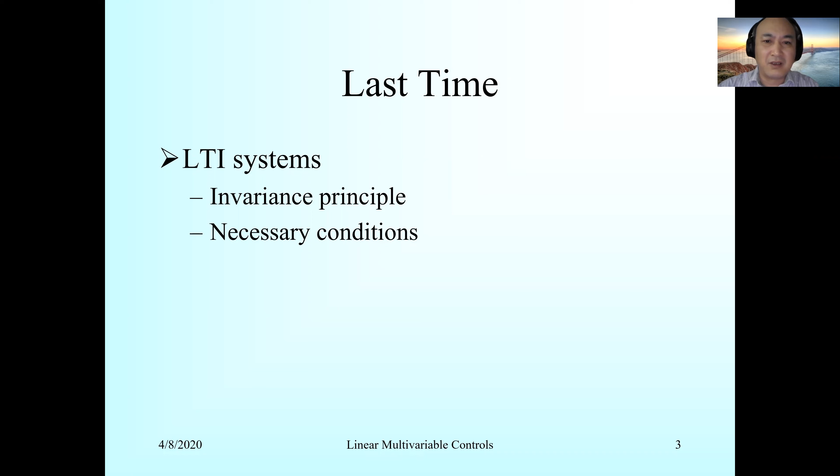So the final exam, perhaps we're doing the same thing as the midterm, okay? It's in-class, 90 minutes. So we talked about LTI systems, necessary conditions, BIBO stability, and the relationship

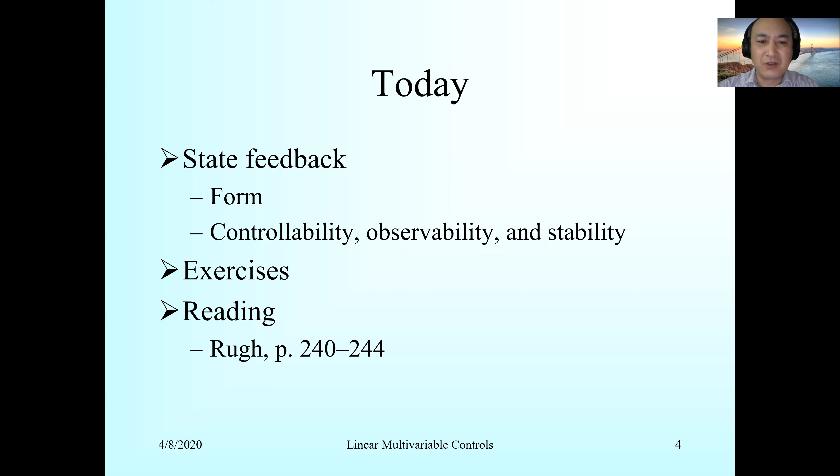to the impulse response. So starting from today, we are going to talk about feedback, different standard forms, controllability, observability, and stability. We'll see if I have time to do some exercises, but perhaps we don't have time, okay? For readings, 240 to 44, on feedback controls.

So remember, we have a difference between state feedback versus output feedback. Usually the logical sequence is to learn state feedback, then output feedback. So state feedback, bear in mind, is just mathematical preparation for output feedback.

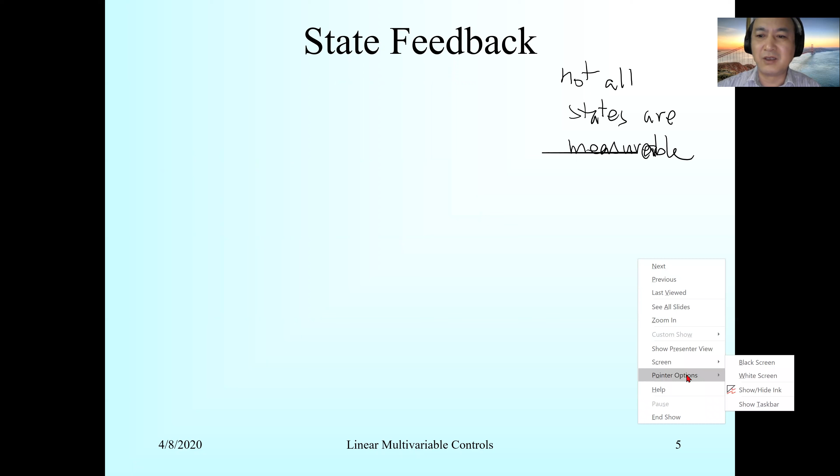So in practice, you should say that not all states are measurable. Not all states are measurable. Some of the states internally simply are not observable - I should say not physically measurable. Not all states are physically measurable. You don't need a 'not' here, I'm sorry.

So the idea is: you have a system, you have a disturbance, and you give a command. This is the command or reference. Give that to it, so you get output. Then, I think this should be called the actuation signal. So you get output here.

So now remember we're talking about output. When we say x dot is Ax plus Bu, y is Cx - if y equals x, then that's called state feedback. But in general it's not true, you cannot measure all states. So you have a C in here. And the dimension of y may not be the same as x, as you can see, C may not be square.

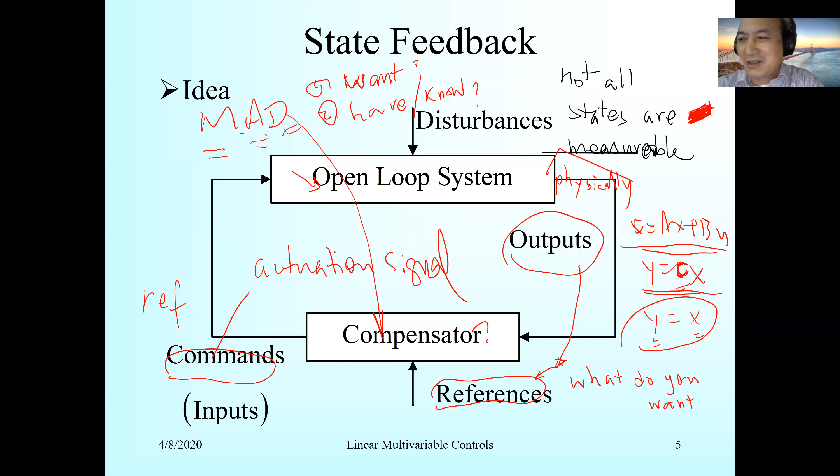But there's another hidden requirement - you have to guarantee the closed loop is stable, okay? And it's not only from an in-and-out point of view, but also internally, okay? Internally, meaning there's no signal within the system that is unbounded. So you cannot say, oh, the in and out looks fine, but inside the system is unstable - then you'll blow up the system as well. So we need not only input-output stability, but also internal stability. I think this is a hidden requirement, it's a basic requirement, this is necessary.

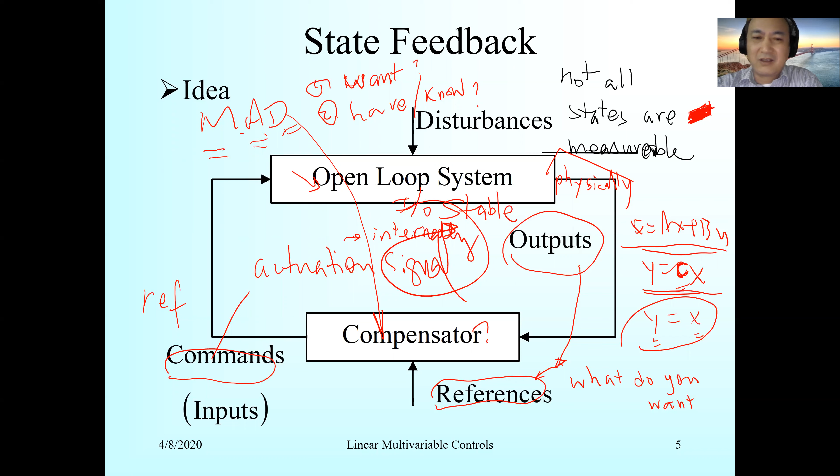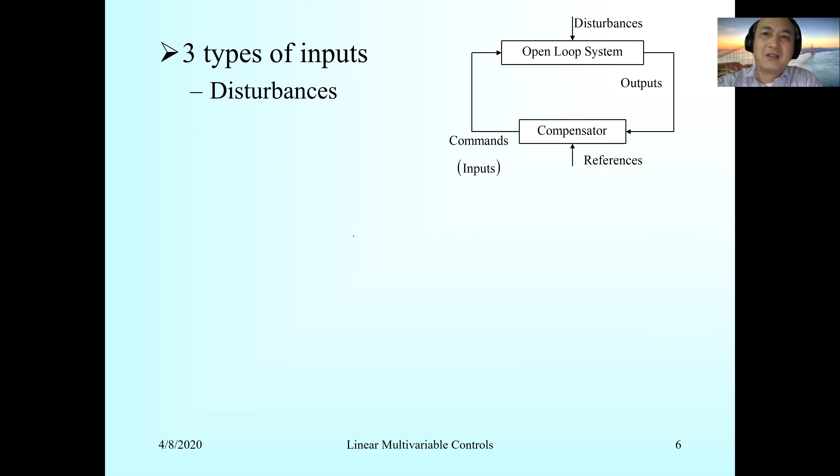So there are three types of inputs. One is disturbance from here, but remember the disturbance could be from here or from here. In the front, it's called a load disturbance. In the after, it's not called load disturbance, it's called output noise, output disturbance, like measurement noise. So remember, when we put it in the front or in the middle, it doesn't mean it's here or here, so it's just general. That's external reference, our command, answering the question of what do you want.

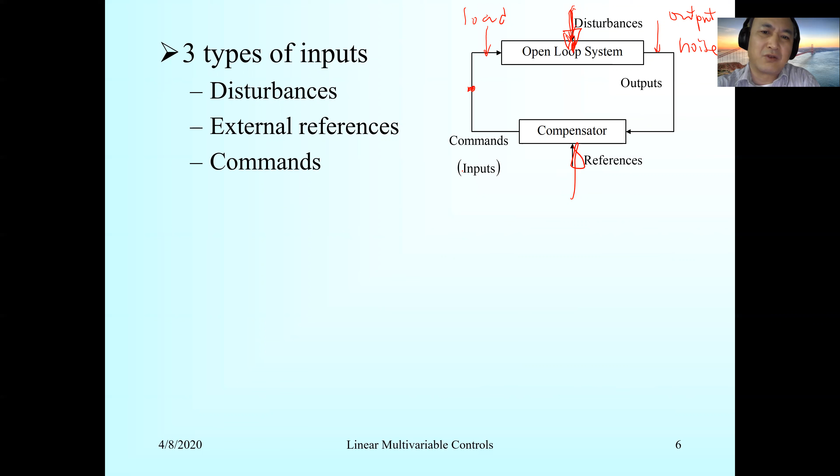What do you want? And commands, that's the actuation signal given to the system. It's also called a control signal. Control signal.

So let's concentrate in this course on commands. We talk about U and Y. We don't do this a lot. So far we focus on not closed loop, but giving U, giving Y, and you have A, B, C, like state space, or you talk about G of s, or in a MIMO setting. MIMO is default, okay? When we don't say anything, everything is MIMO. And actually, if nothing is specifically said, it's LTV. MIMO can be state space, can be IO, input-output model.

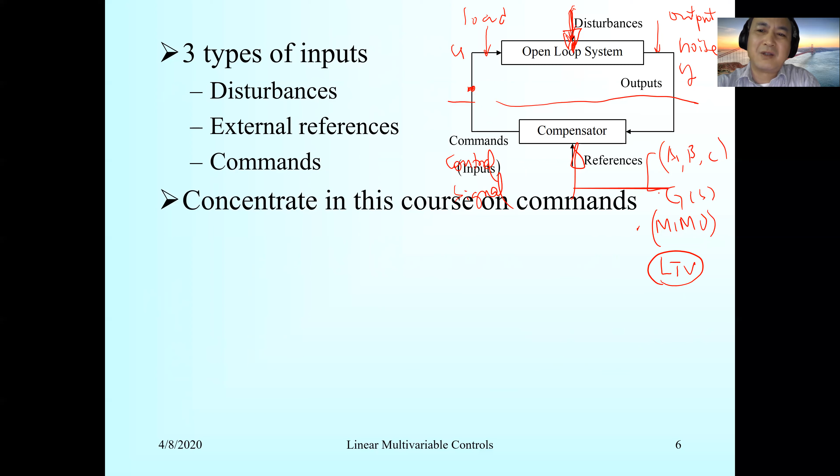Talking about the state variable model ABC, the controller is a compensator, called a state reconstructor, because I said the state X feedback is not always possible. I told you, not always possible. So how can we make this happen?

So basically you have input, you have output, you also have the input signal. These are U and Y signal coming out of here. So this is called OBS, observer. It comes out with an estimation of my X. Then you use everything you learn for state feedback. So you need to have a reconstruction, this is called reconstruction of X hat. Of course, I hope my X hat asymptotically will converge to X of T as T goes to infinity, so it's asymptotically stable. We'll show this later. So that's the estimator of the state, and then you need to decide what's the gain feedback.

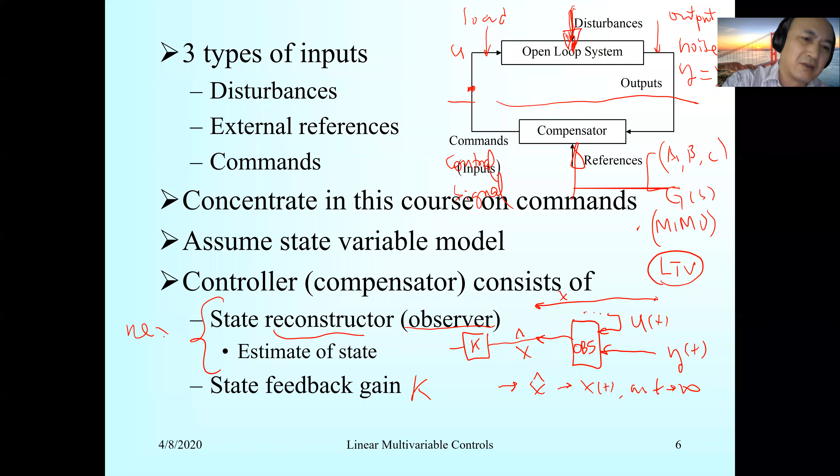So let's start. And of course, this is LTI. State is available, so Y equals X, so C is I, okay. State feedback means you have a reference in here, add to this U in here, but you also have a minus KX. So this is called state feedback.

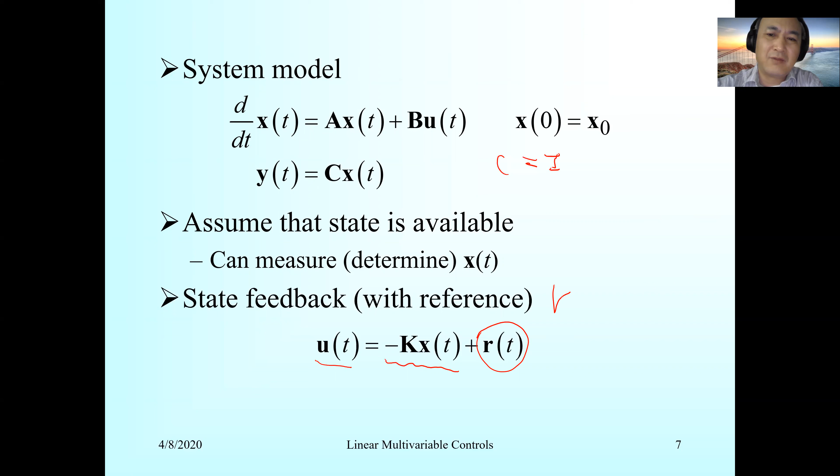So do you guys believe this is right? Why shouldn't we put another KR gain matrix in here? Why? I don't see any reason you should set the coefficient in front, that is I. So right now it's I, right? So that's not really correct to me.

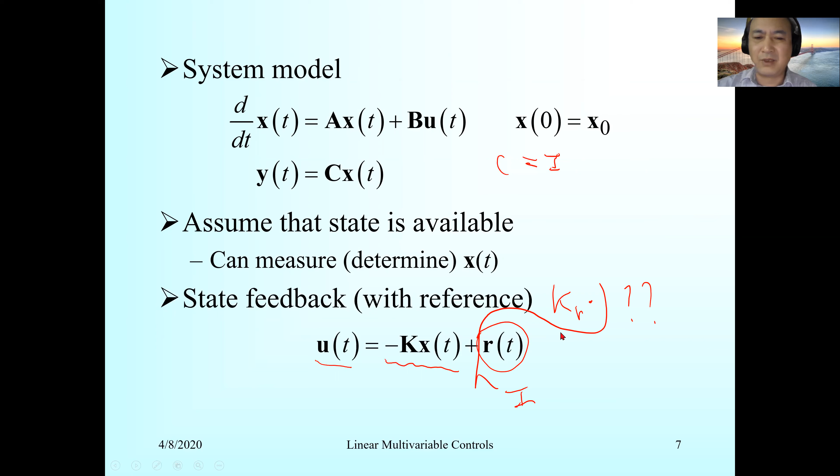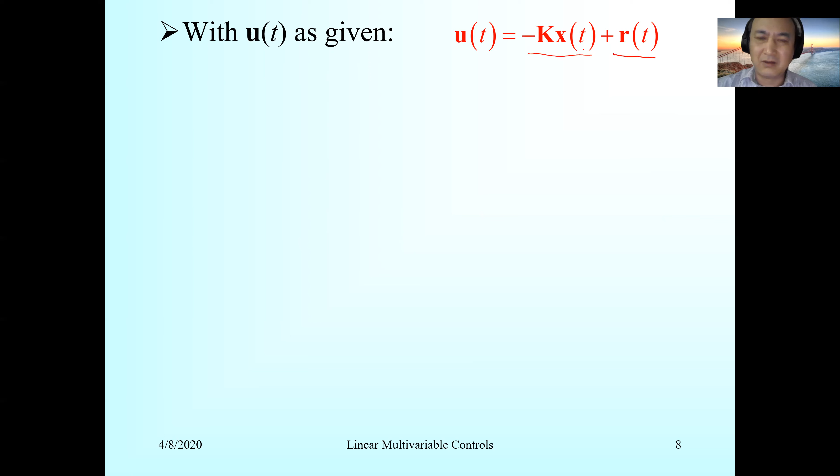Let's see. We just have a reference in here, have K in here. Basically I have a U which is my control, Y is X, C is I, okay. Giving this X, you have K times X. Now you do this way, okay, that's correct. You put I in here, then you have this signal here and drive it, drive it. So that's, this is a control structure, control structure.

So control design, usually you first ask, what is the structure? Second is, what is the parameter? Control parameters or control gain matrices. So when you talk about control, you should answer two questions: what's the structure, what are the parameters? So here we answered the first, so now what remains to decide is the K. I don't know what is the K. So I need to choose this K such that the overall system is stable.

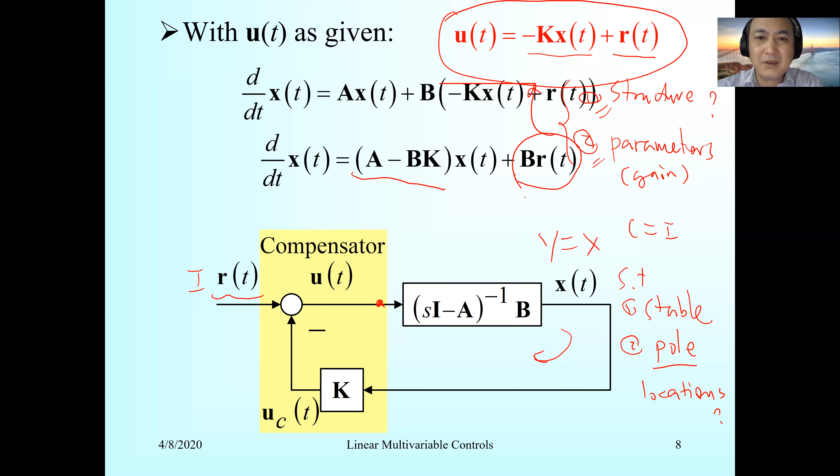So when we write this one, we can see we have A minus BK, we have BRT. So, okay, this is called closed loop state equation. Closed loop state equation. No question, right? So this is simple.

But I hope you notice that this reference RT is given, and B is also given. And remember, we should have the question: is A and B minimum realization? Is A and B a controllable pair? So all these are the questions. So it's not like an arbitrary A-B combination will do all the work. That's not true.

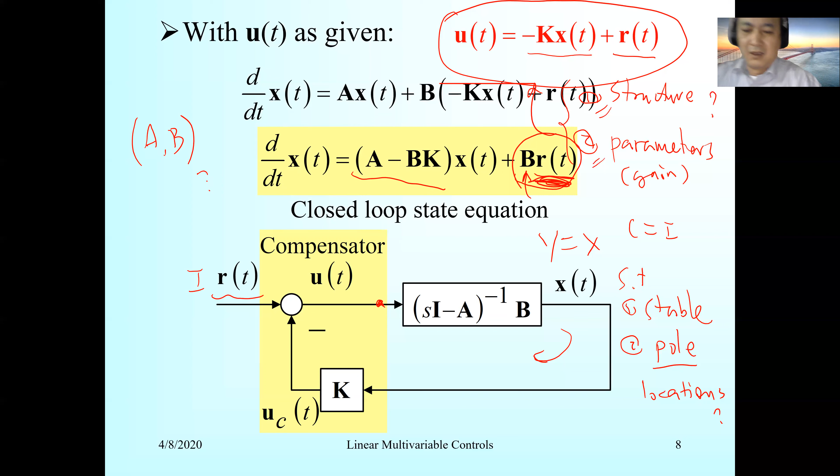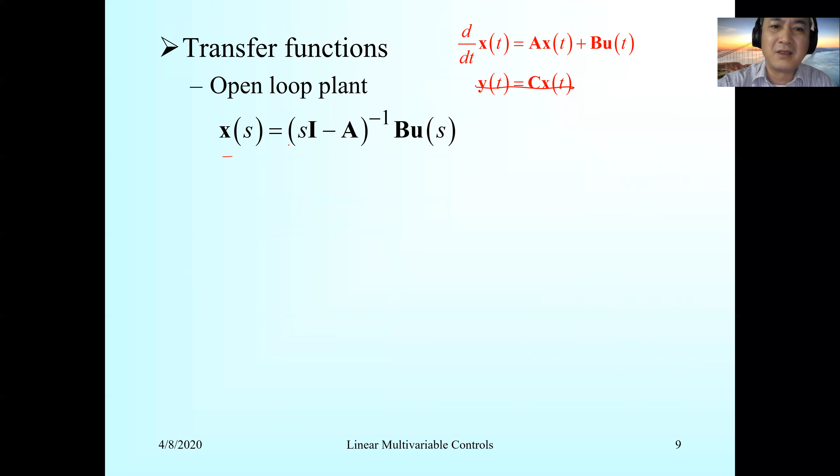Let's move on. Let's say the transfer function is like this. Remember, in overall speaking, C is I. In this case, you don't consider this term, so you only have y equals x, so x is y. So it's (sI minus A) inverse B u, okay? So that is something here.

What is a transfer function? Transfer function is basically x of s divided by u of s, okay.

Remember that we are doing MIMO here, so we need to be careful, and writing it this way is questionable. You should not write it like this, since these are two vectors. So be careful. This is a matrix, it's a MIMO matrix, and you cannot swap their positions.

So this is an open loop system, an open loop system without feedback. If we have feedback, U goes to this equal to K times X equal to UC, the control signal. And the UC, that control signal, will feed back, and this UC will get R minus this UC. I'll come back to this later. So this is called closed loop with this K.

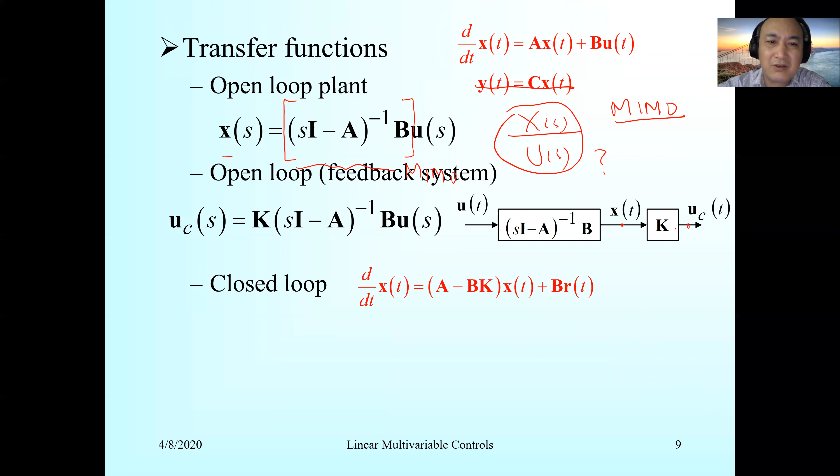From UC, this is open loop. Once I have closed loop, then I have this form. So then what is the input? Input is this guy. So instead of talking of X divided by U, I have X of S divided by R of S. So the whole thing becomes like this. So compare this one to this one.

I don't see anything changed except you have a BK in here. BK in here. B is given and K is to be decided.

So to decide the K, you have to tell us what do you want? What do you want to achieve? We'll answer this question later, but keep in mind, control is to address the question about what do you want and what do you have, what do you know? These two questions.

But there are two more questions after that. Everything is done, then you have to answer two questions. One is how optimal, and how robust. So if you ask these two questions after everything is done, then you are at a much higher degree.

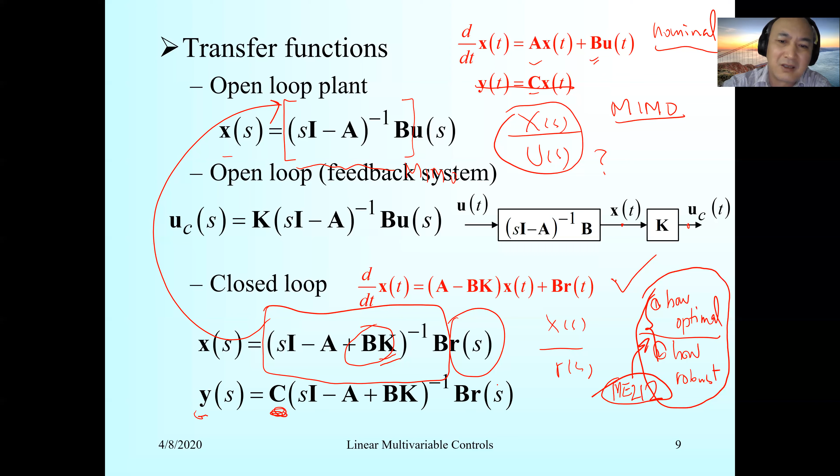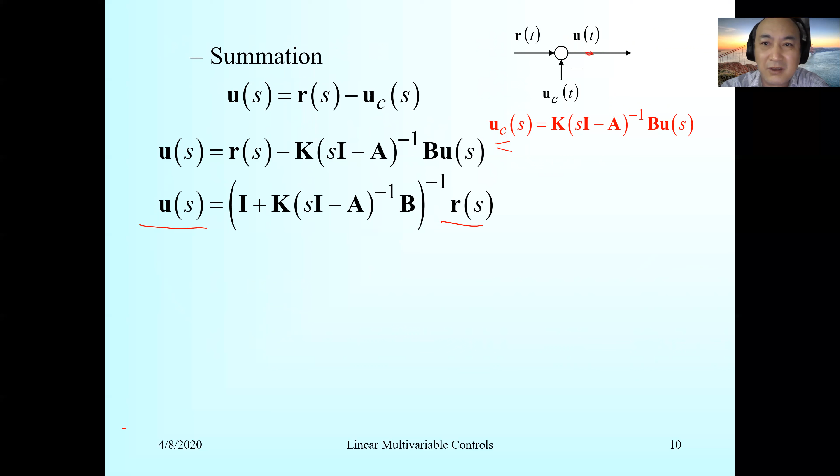So then if you have a C, then Y equals CX, and you will get this closed loop system. So there's a summation in here. Of course, we derive the UC signal in here, so you get this. So U of S is R of S minus this. So you have this, from U to R, from here to here.

So this one has a special form, this is a MIMO case. So this one inverse is here, because we say this is U. So this whole thing is U. And U and R is converted from here. And this whole thing has to be the same as we derived before, using other derivation methods. These two things will come up like that.

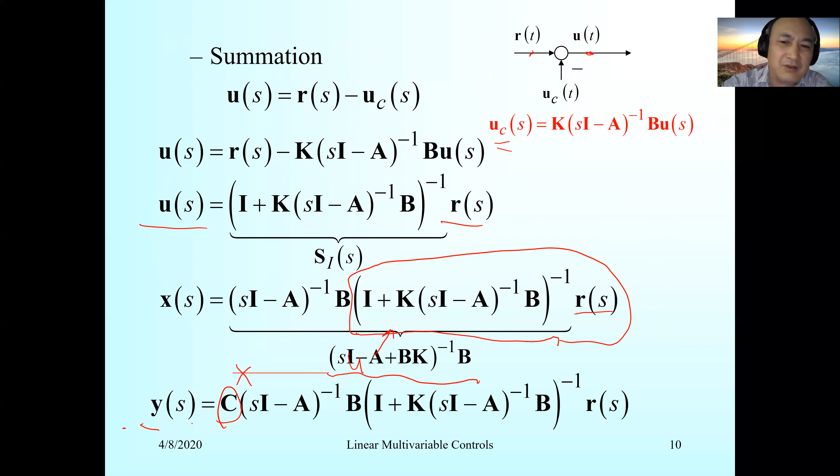So if you have output, then you just add C times X. So X is this big one. So from Y to R, you can just derive it. I hope this is not very confusing. One thing a little bit confusing is how to convert U and R.

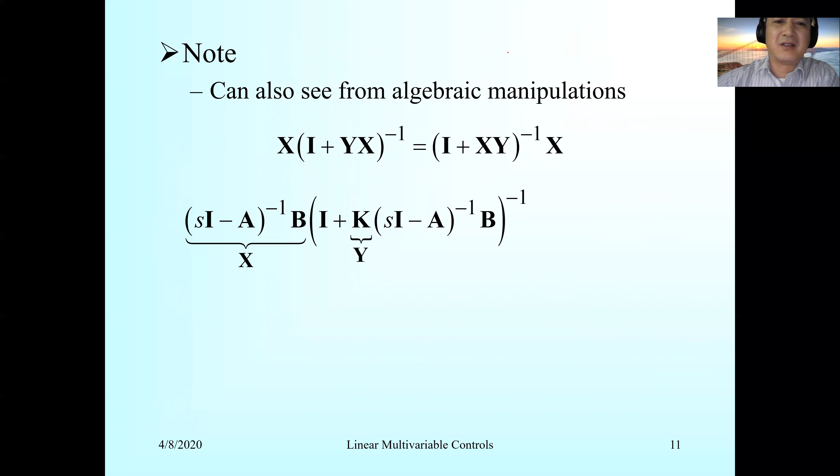So from algebraic manipulation, this is interesting, and this can be proven. We assume this side is X, and we also know this is X, so this is Y. Then we can pull out this one inverse, and this is X. So this is my X.

Let's mimic this to check. This is true. If you need a proof, that's actually easy. You left multiply this side with this, so you get I plus XY times X. And you multiply this one on both sides, you'll have X times 1 plus YX. So you right multiply both sides with this, left multiply with this, so this to this, to here. So you get X plus XYX equals X plus XYX. So it's the identity.

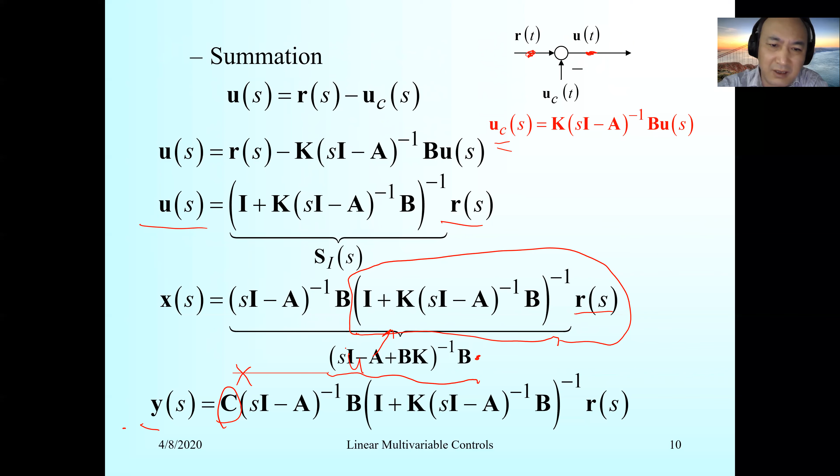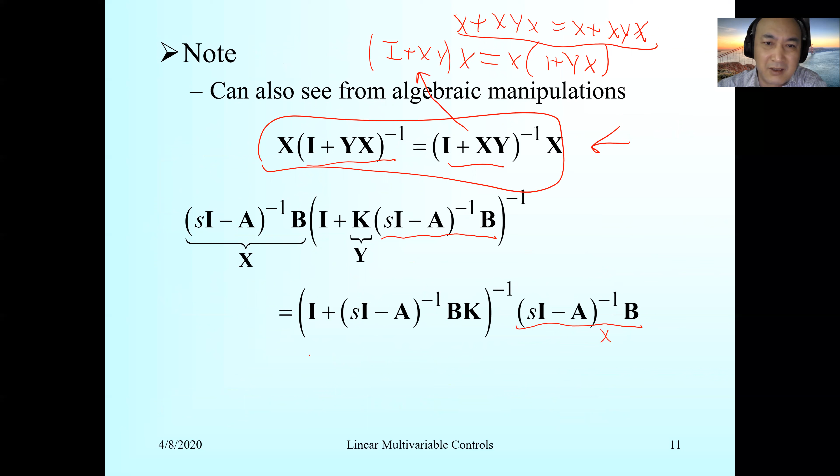The reason is we never see something like this, Y to R or X to R. We didn't see it like that, so this is very strange. But we have seen this whole thing before. So then I'm showing you that this is a matrix identity, and this is called a matrix identity.

So then we can write stuff like this. However, we can group them because you have an inverse, I have an inverse, I can group them. So I can just multiply inside, and this is I, this comes out. So you will get the same thing like this. So all this MIMO signal manipulation, just be careful about left and right multiplication. You need to be careful.

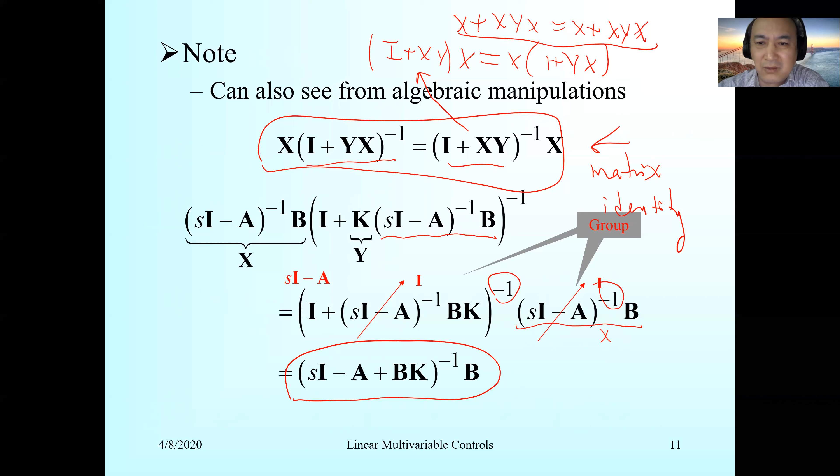So that's open loop, closed loop, that kind of manipulation. I hope this is quite clear to everyone.

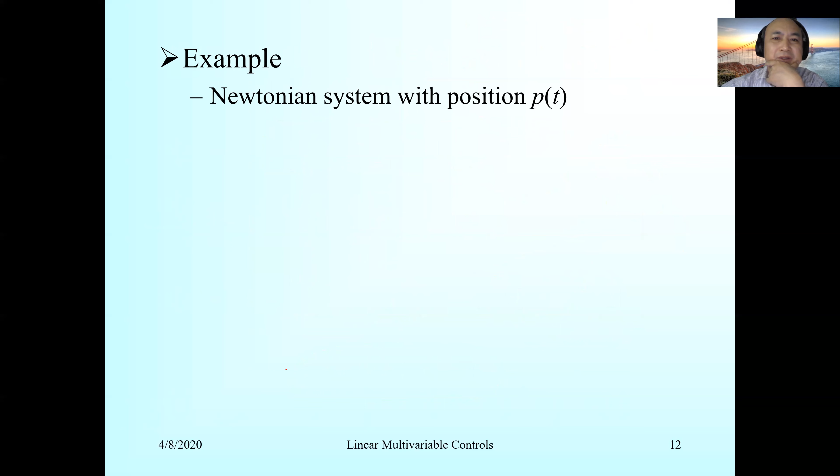Let's see an example. Newtonian system with position P, you add a force. What is this? This is Newton's second law, right? So position double dot is U, my force, like ma, F equals ma. This guy is my ma, and this is F.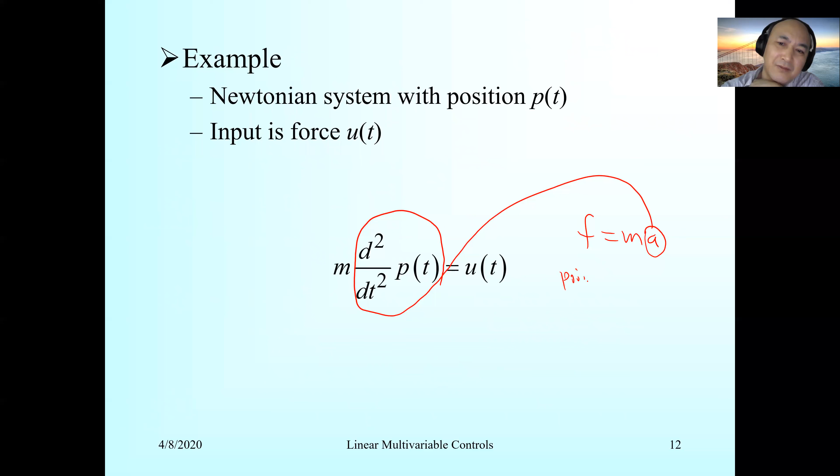So on the other hand, Newton's second law is also called point mass. And if you put the U in here, and you put P in here, what you put here is this one. So you should have 1 over m, right? So basically the point mass Newtonian system is nothing but open loop wise — it's a double integrated system.

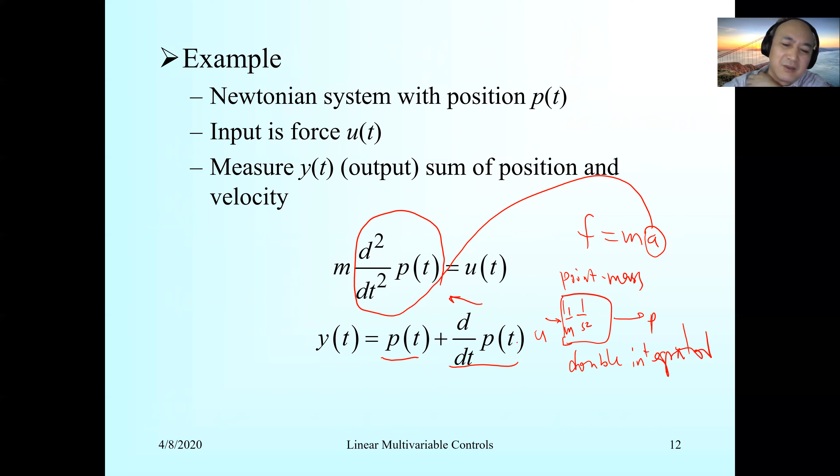So if you see this one, you should immediately say point mass Newton's second law. So assuming that you are measuring the output, and the summation of the position and speed add together as a variable, it's measured. So what's the transfer function? Because this is position, this is velocity, and this is a double integrator — that's my transfer function.

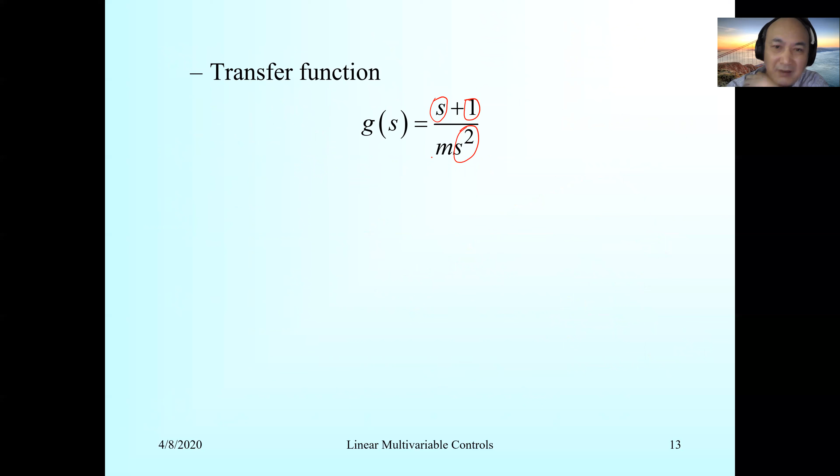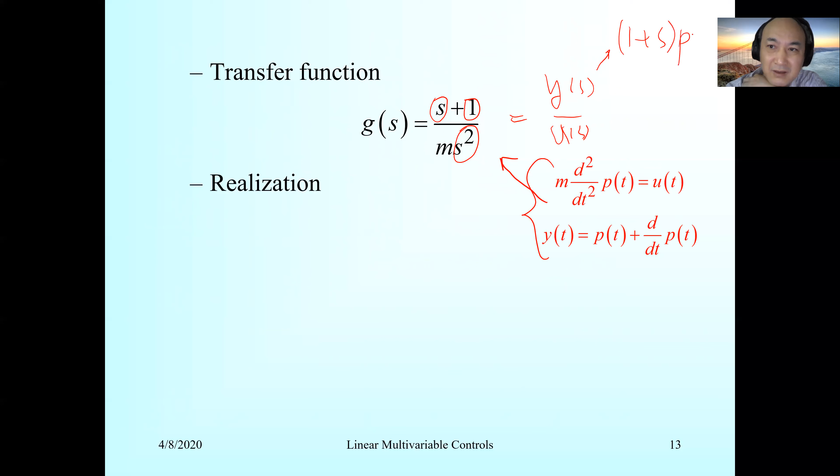And this transfer function, we can do realization, from an in and out point of view. So this is basically with a U of S, and this is Y of S. But Y of S is actually 1 plus S times P of S.

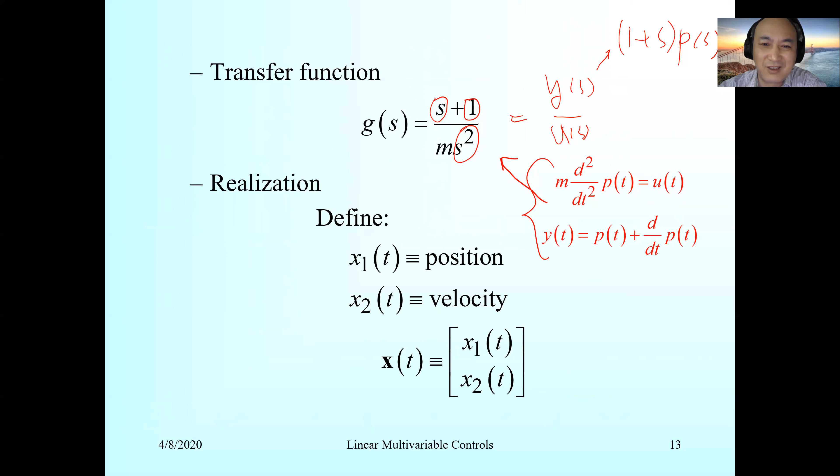So x1, x2, that's the standard state vector. Let's just say there's unit mass. So we're going to have something like this. What's this one? This is nothing but the Jordan form. We learned that the last column, last row corresponding to B, if it is non-zero, then it's controllable. And its first column corresponding to C, if it's not zero, then that's observable.

This is a SISO system, isn't it? Yes, so then it is. So this system, we can see this ABC is both observable and controllable.

But remember the output here — so I have x1, x2. x1 is position, x2 is speed. Say for example, I'm only measuring speed, I'm not measuring position. Then we are going to see this system is not observable. Yes or no? So without measuring position, position is troublesome.

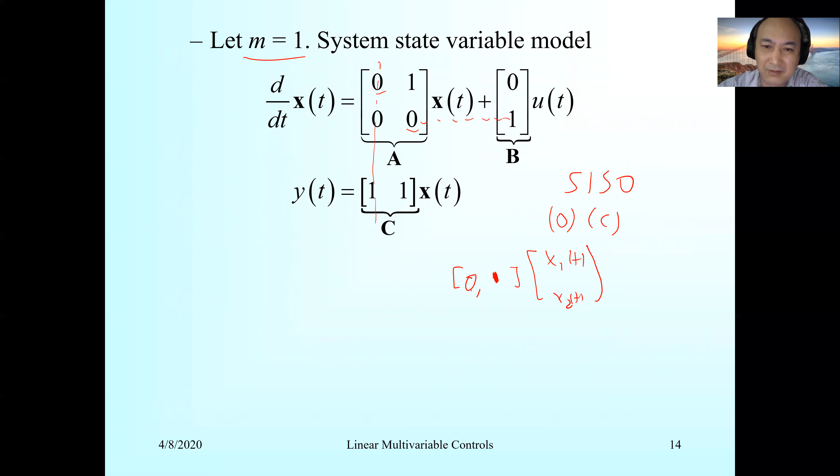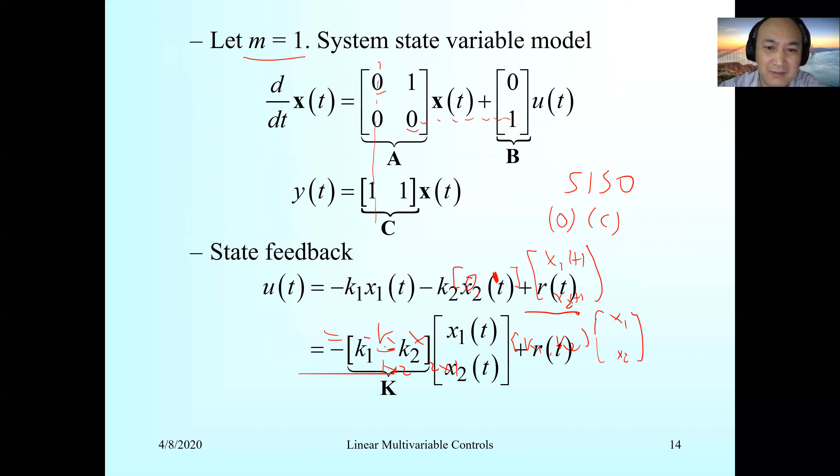So that's the structure of my controller. I'm doing state feedback, and yeah, we write it this way — it's the same thing. Then the closed loop system will be A minus BK.

Remember, B is 2 by 1, K is 1 by 2, that's why you have 2 by 2. Originally 0, 1, 0, 0 is A. After you have done this, you have A minus BK here, that's BK. We didn't have any change in here, there's a C in here. So actually this looks like a controllable canonical form.

So that's a closed loop state space. If we do a closed loop system, you didn't do anything here. Be careful, I didn't do anything in the numerator, but I only changed the polynomial in there. Previously you only have s square, but now you have this.

So remember, I call it M, S, D: mass, spring, damper. I hope you understand, in this term, this is due to mass, this term is due to damping, the damper, and this K1 is due to spring. So it's like you have a point mass.

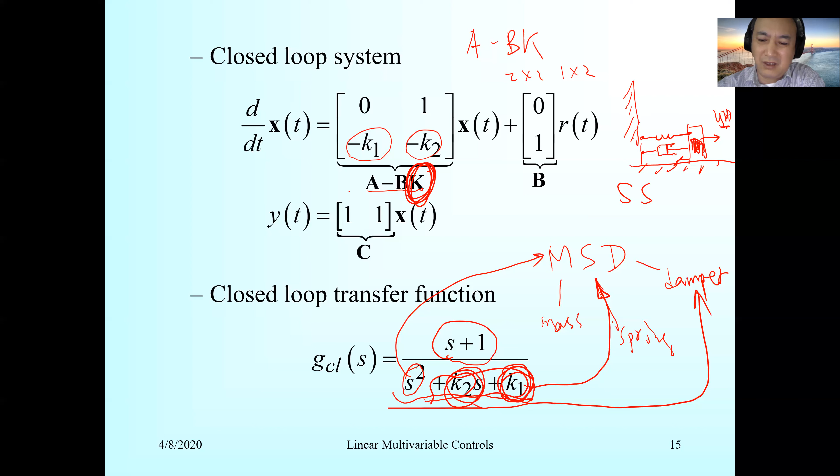So in other words, by introducing this K, not 0, you basically can change the system behavior, including its internal behavior and in-and-out behavior as well. So that's the beauty of the state feedback, you can change it. But the question is, can you arbitrarily change the behavior? That's the question we need to ask.

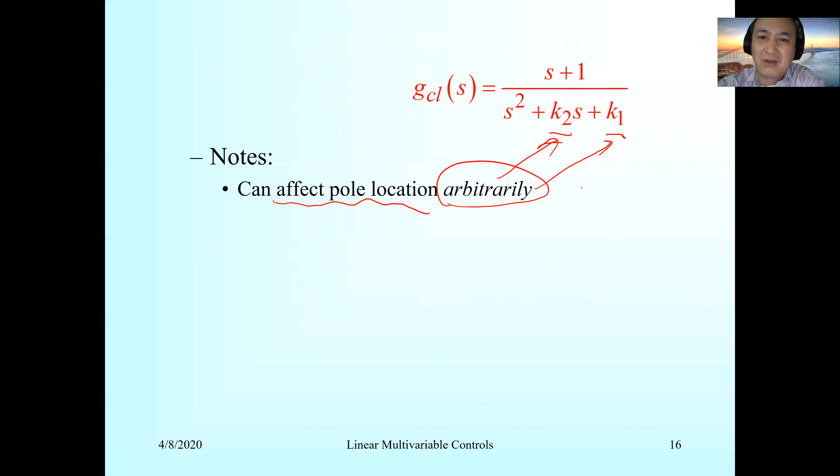It can affect the pole location because K1, K2 can be chosen arbitrarily, so the pole position can be located. So it's called choosing K1, K2 for pole placement. For the A, B, C system, somehow you can make the pole of the A matrix change to the desired position. This process is called pole placement. In the future I'm going to use PP for pole placement.

And nothing changed in the zero, okay? The zero cannot be changed via state feedback. So if somebody says they can do it, that's a lie. You cannot. So then the question is, can we do zero placement?

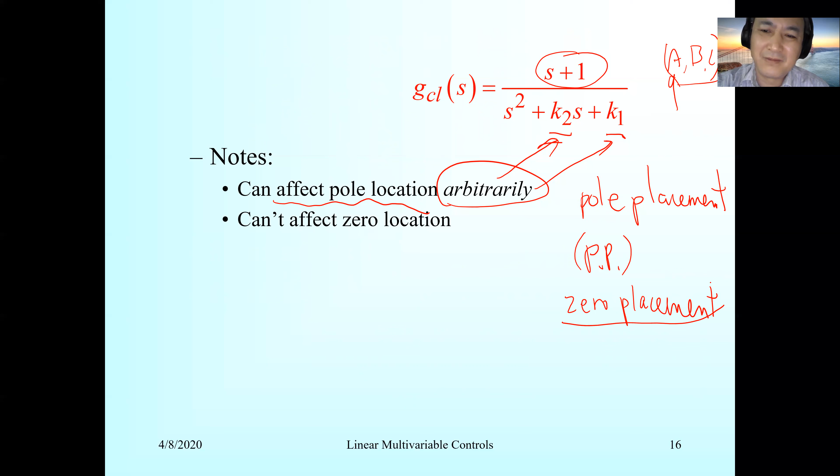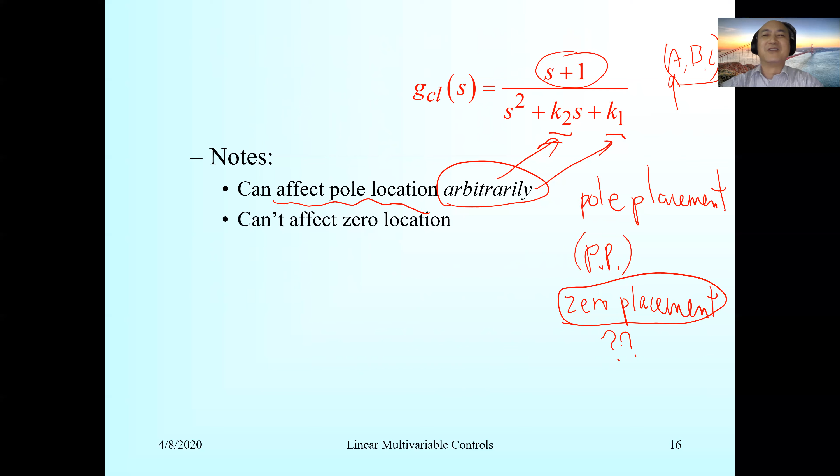Good question. My answer is, I haven't seen a systematic method to do that yet. So it's a topic of research. You can Google this term to see what you can find, zero placement. I don't think so, I don't think so.

So it's possible you can choose K1, K2 such that the pole can be coincident with my zero, so you can cancel out. So the closed loop state variable model may not be minimal. So after you have chosen the K, you have system A, B, C. After you have chosen the feedback control, it becomes A prime, B actually didn't change. So you only changed A prime. So this one could be minimum realization, but the whole thing after that, because of a pole-zero cancellation, it may or may not be minimum.

So this is something you should observe, because of the cancellation of zero. The pole can be arbitrarily placed, realigned with the zero, and it can be cancelled.

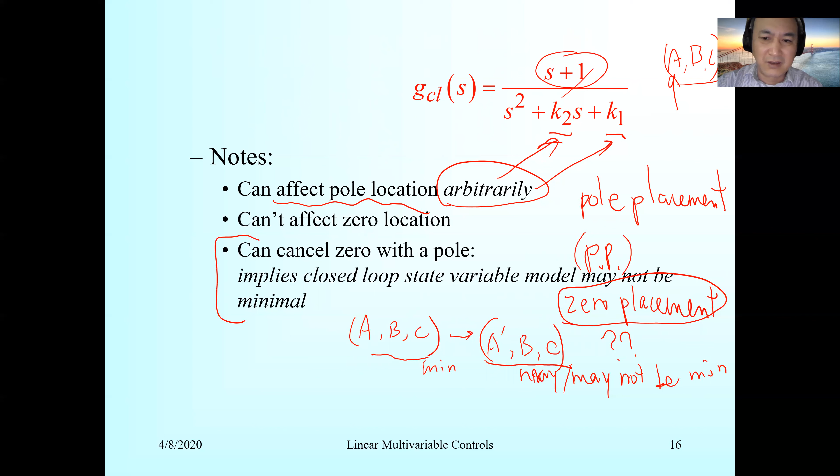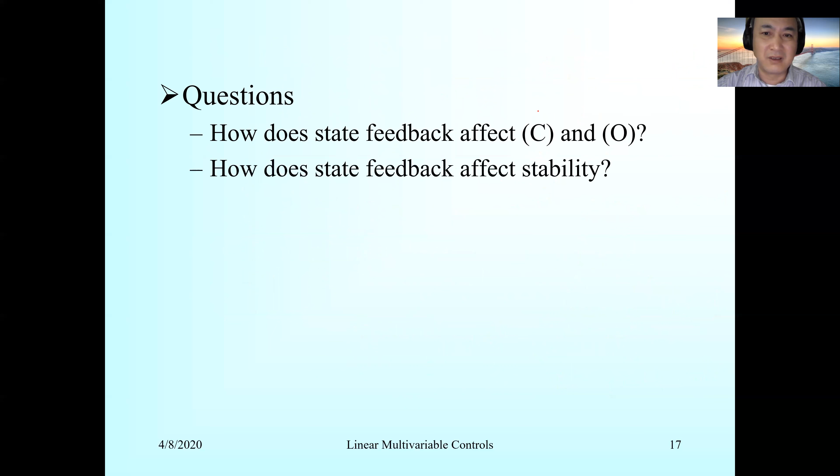So will the state feedback affect my controllability and observability? This is also a quite fundamental question, and whether it will affect stability. As you can see, the answer is, because you are placing the pole arbitrarily, you could mess up the system to be unstable by putting the pole in the right half plane. So what we can do is the state feedback, and we already answered that, we can place the pole. What if the state is not available? Then you have to use observers to reconstruct an estimate, it's called estimate.

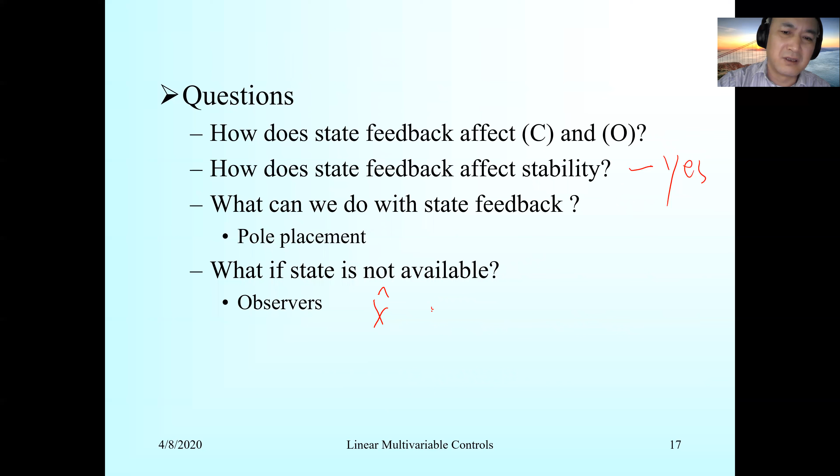Observer can be also said state estimator. You estimate X hat.

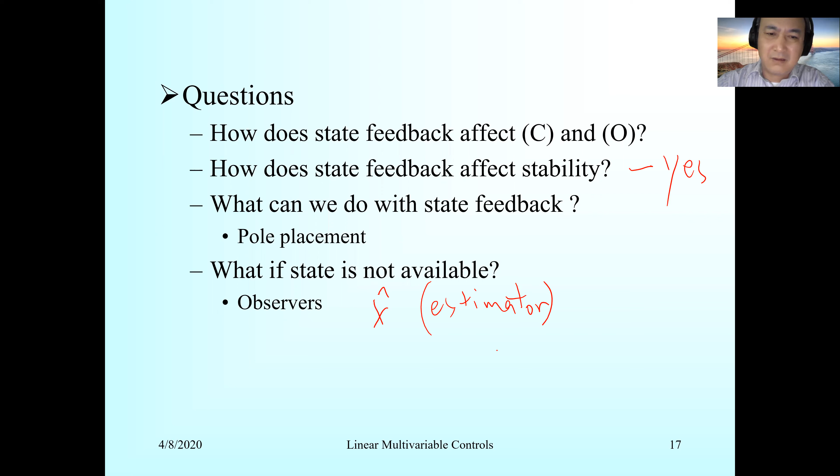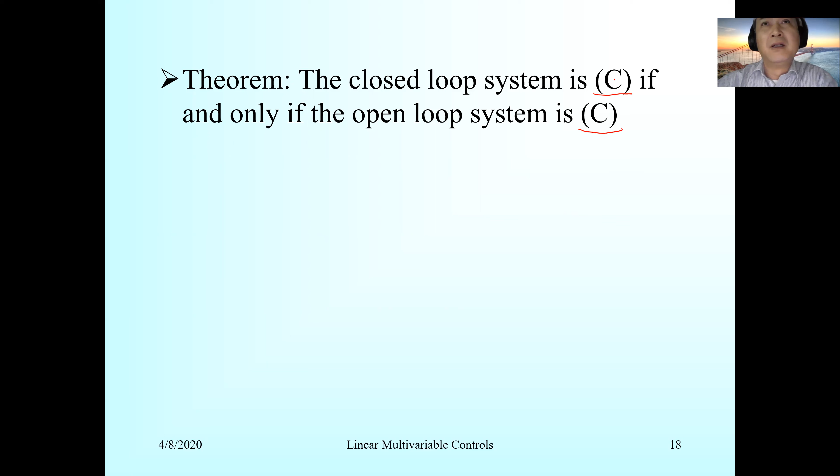So here are the answers to the questions. The closed loop system is controllable if and only if the open loop system is controllable. So the controllability property never changes during feedback. The Hautus test is something like this.

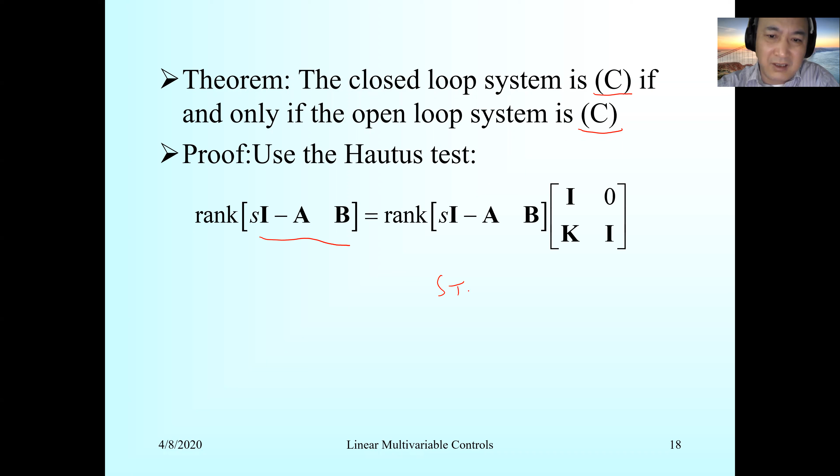So right now, because this is open loop, right? So closed loop is actually sI minus A plus BK. Then you have another B. So check the rank, basically you have this multiplied by this. So this is full rank, will not affect. So the rank is the same as this. Okay, that's beautiful, isn't it? This argument is beautiful.

Okay, so obvious. Whenever you see 'obvious', that means it may not be obvious to you. When you read a paper, if it says 'apparently' or 'obviously', you need to be careful. Usually it is not.

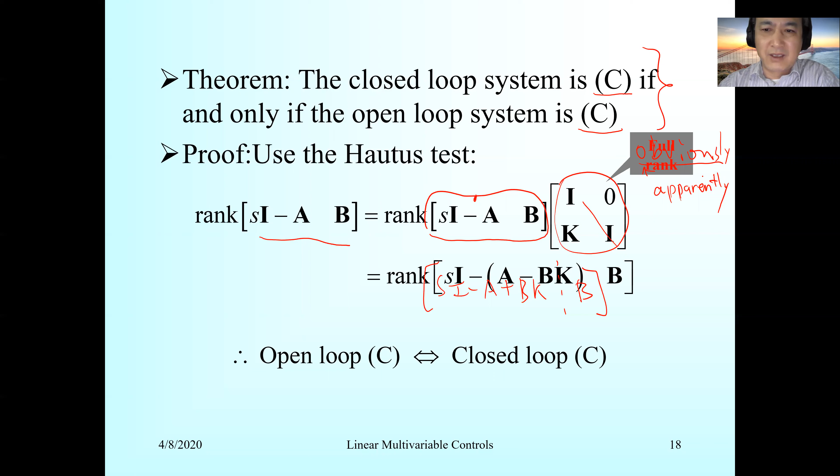Open loop controllability and closed loop controllability will never change. If I want you to give a talk or a proof, you should be able to argue it in a very simple way using this Hautus test about the rank.

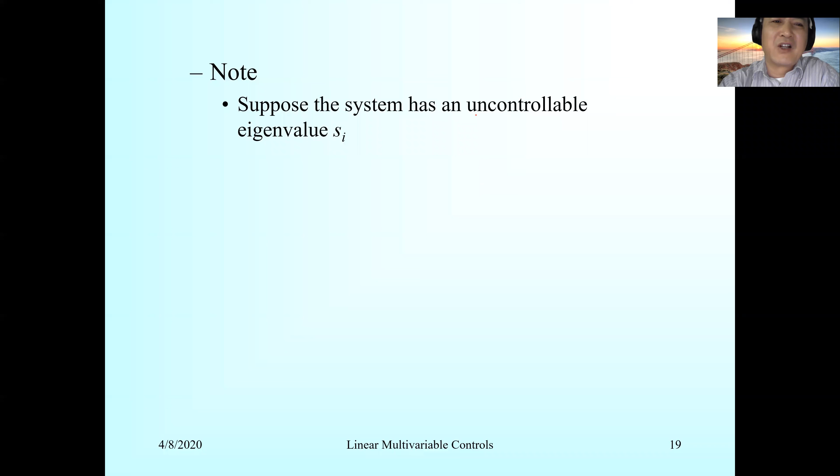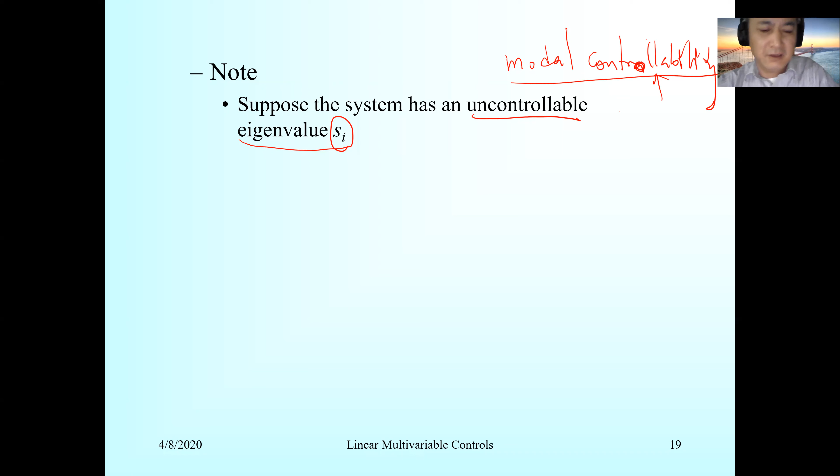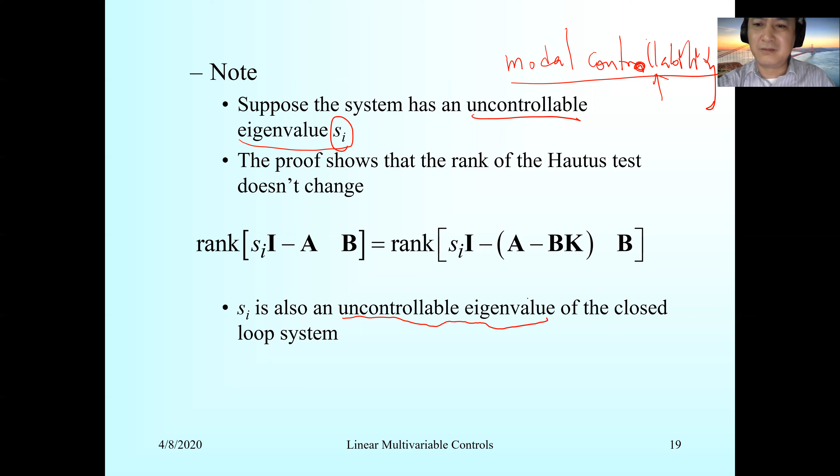If the system already has something uncontrollable, it's not minimal, okay? You have uncontrollable eigenvalues. If it is not controllable, this relates to modal controllability. If you forgot this, go and check it, including those very complicated Jordan blocks. So the rank didn't change. So after feedback, those uncontrollable eigenvalues remain uncontrollable. Okay, that's very important.

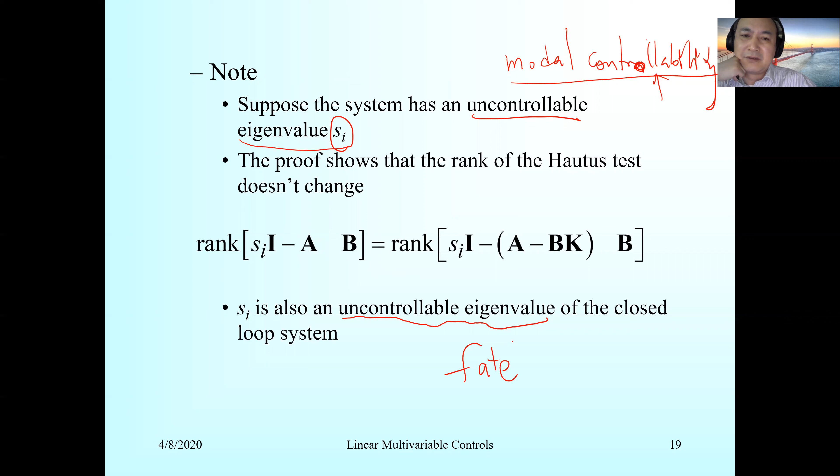In other words, feedback will not change the fate of controllability. So if you have something not designed well and it has something not controllable, then you do some feedback and use some smart ideas, you will never make it controllable. You have to throw away the system and rebuild another one. So controllability is a fundamental, defining physical feature of the system. You cannot change it via your smart feedback control, whatever. So if that mode is not controllable, no matter what you do, you cannot change that fact. It's fatal, it's fatal. So if you have something not controllable, the message is don't try to control it. Isn't this so simple?

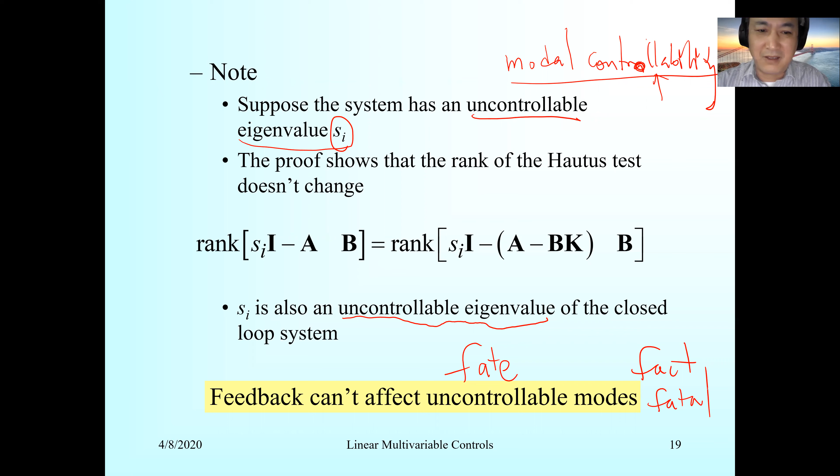Because it's not controllable. But in math language, here it's so obvious. And the same thing applies for observability. You can factor this one out, then this is totally not possible.

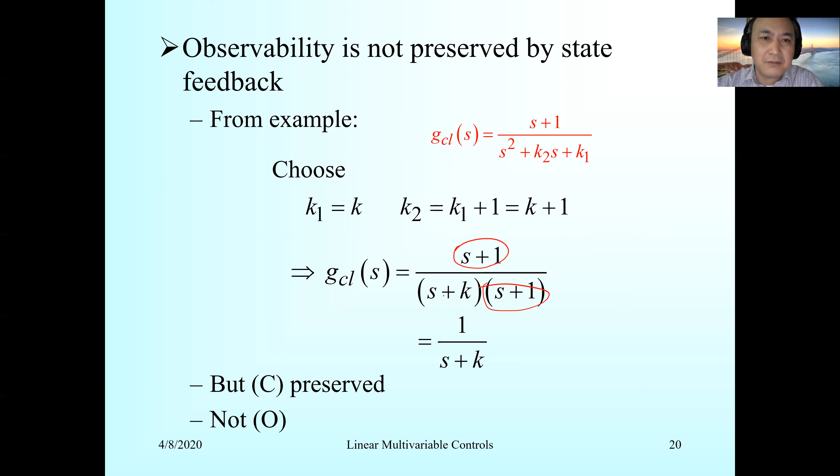So observability may lose it. So in this case, the system is no longer observable, but controllability is preserved, because of this cancellation. I don't like saying 'is not' preserved, I prefer 'may not be preserved' - it's just a possibility. May not be preserved, it's better.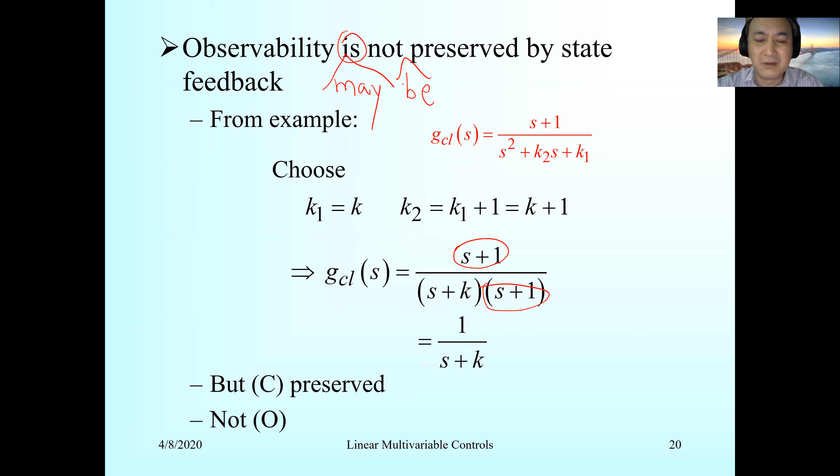So let's run a few examples, and then we can stop and ask some questions. So let's see, this is A, B, C. What are we doing here? So this is a MIMO system, it's 2 in, 2 out, a 2 by 2 system. But the internal state vector size is 4 by 4. And this is an LTV system because of this thing.

So you do CB, C1B, C2B. Suppose B is not 0, one has a constant relative degree. Do you guys know what relative degree is? I think at some point I explained it, when we talked about Markov parameters. Is it the difference between the polynomial in the numerator and denominator? Yes, for G of S that's true, but that's for SISO. For MIMO, how do we decide it?

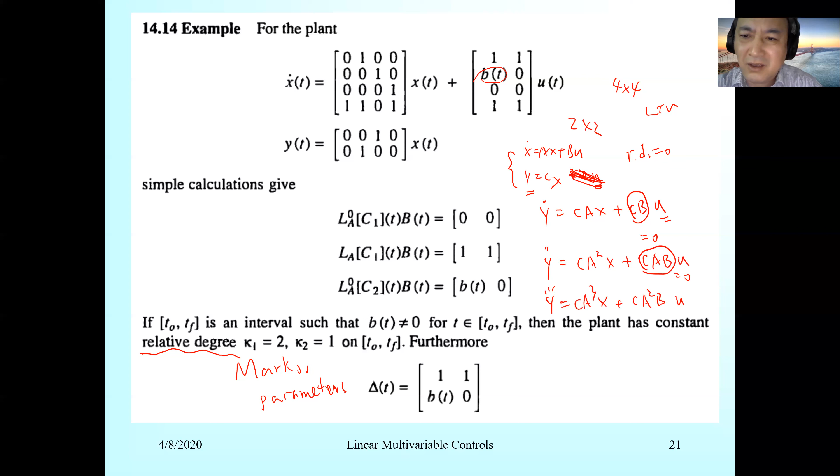So you see some patterns here. You take the derivative until it's not 0, okay? Not 0 - then this is called relative degree 2. So this is not 0, but it's 0 for lower derivatives, and the third derivative is not 0. Then this is called relative degree three - that's basically the check.

And the relative degree, sometimes because it's an LTV setting, could be time dependent, depending on the time. So it's quite complicated when we talk about relative degree itself not being constant.

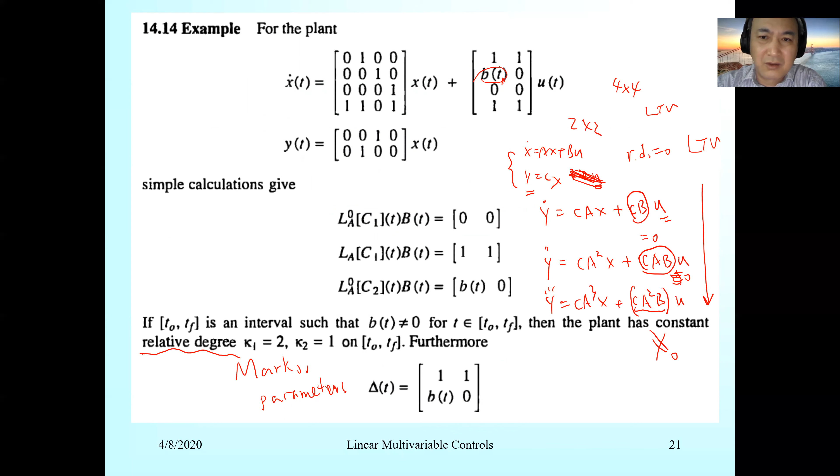So I have Ax plus Br - the non-interacting closed loop state equation is like this. So you can introduce this state feedback, state feedback with time varying gain, and substitute. So this is our closed loop system, and it can make the closed loop system LTI. So this is kind of more interesting, to eliminate the time-varying effect here, by introducing feedback control.

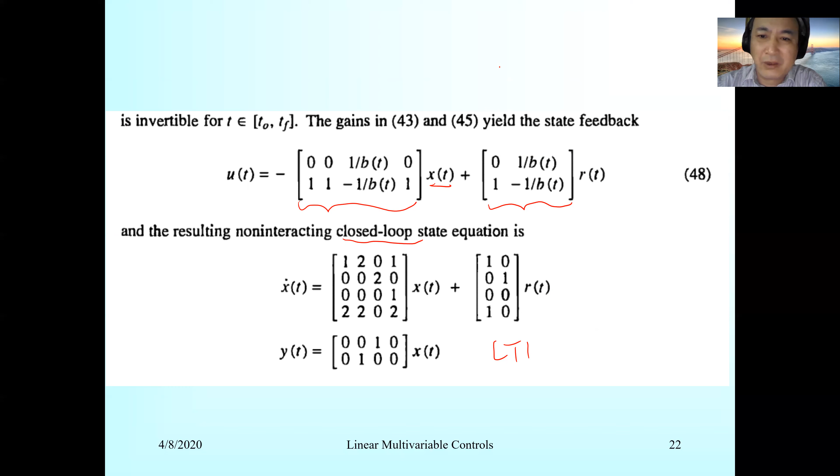So just let you know that in the LTV case, there are more things there, including that the relative degree is time varying.

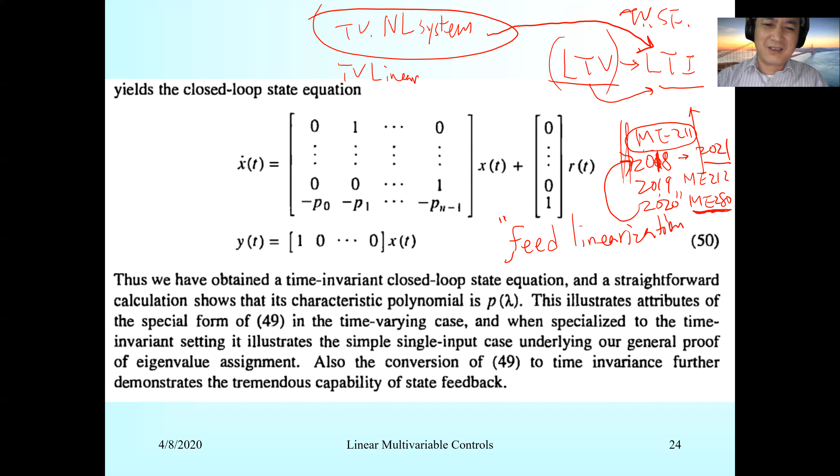So here are other examples - we are extending some concepts for feedback. You can see feedback can do way more, not just pole placement. Feedback has limitations - you cannot change the position of the zero, we have known that. But here I'm showing you, by 2 examples, that feedback can turn LTV into LTI, and feedback could turn nonlinear into linear.

Remember we have an Earth satellite of unit mass with this model. R double dot equals this minus this plus U1, the propeller, and the angular acceleration theta double dot is something like this. So you have U2, it's a 2 component input, so it's a 2-input, 2-output system with R and theta as outputs.

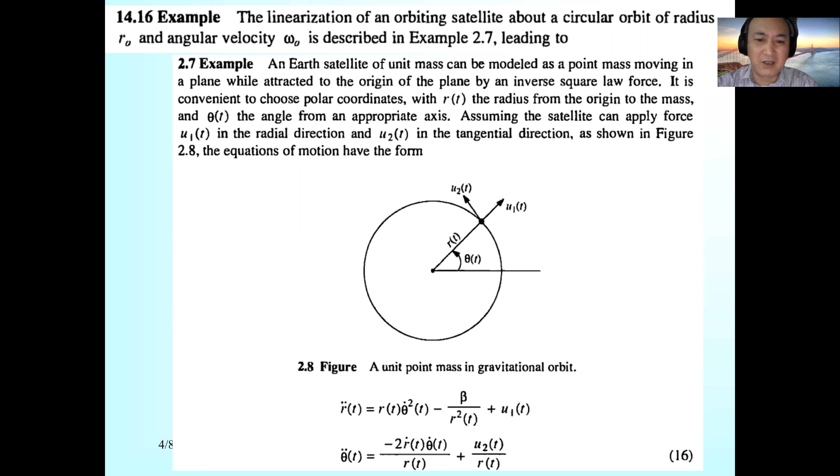Let's go through this one more time. You have initial conditions, then you do linearization. These are nonlinear systems, okay, very nonlinear. But if you assume the initial conditions, then you have some nominal solutions, so theta nominal will give that.

So I hope we can linearize the system around the nominal system, around the nominal solutions. After that, we end up with an LTI system with this A, B, C. So we discuss observability and controllability questions here.

Everything here is controllable, so we can generate those forces on the satellite depending on the states, so that deviations will be dampened out.

So this is, I'm hoping to design a state feedback control so all these matrices satisfy some of the desired properties. We hope to add some damping in there, like I showed you in the mass, double integrator, point mass Newtonian system, by introducing all those K's inside.

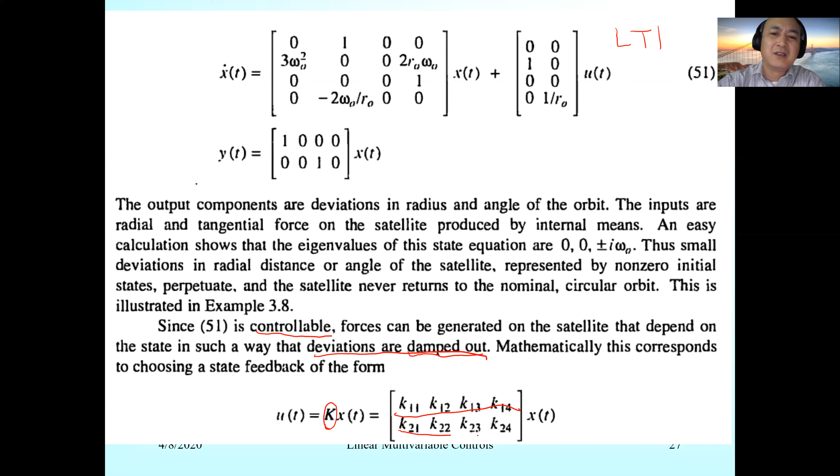So what are the strategies to choose the feedback gain? You can see there are so many, there are some 8 possibilities of choosing them. There are several strategies so that the closed loop is exponentially stable, indeed to place the eigenvalue at desired location. So this is nothing but pole placement.

It's possible we choose some of the components to be 0, some of the components here, just by observation. Then we end up with a system with 2 triangular matrices, like that. By doing that, we see we have 2 modes, one here, one here. So you have 2 terms, one corresponds to this guy, the other corresponds to that.

So this type of design by observation is still trial and error. I don't like that, trial and error. However, by observation, trial and error, if you bring in physical insights, that is okay.

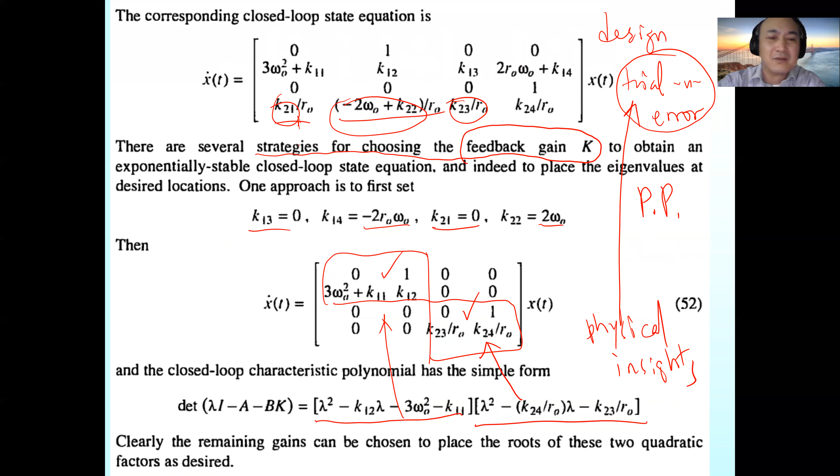That is okay, especially in this case, they purposely made some assumptions. So K21, this one can be 0. K13, this can be 0, this also can be 0. So then they have a block diagonal type of thing, so that will make the design easier.

But this is not the way we want to go. I just want to tell you that with state feedback, you can bring in physical insights when you choose those gain matrices. We talked about the state feedback concept and did the interesting matrix identity, which I hope was fun.

Using the Hautus test, we showed that state feedback does not affect controllability. However, this could affect observability. In other words, the state feedback actually could make pole-zero cancellations.

And we showed two examples, like an LTV system through feedback could become LTI. We also showed that a time-varying nonlinear system could also go to LTI. This is called feedback linearization.

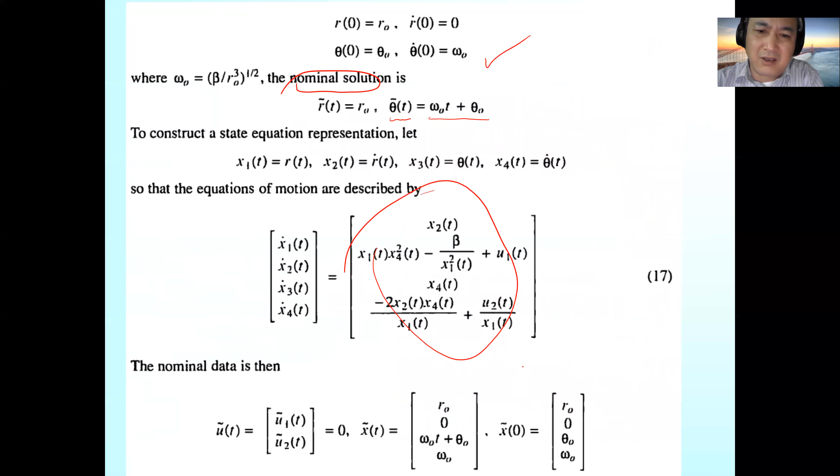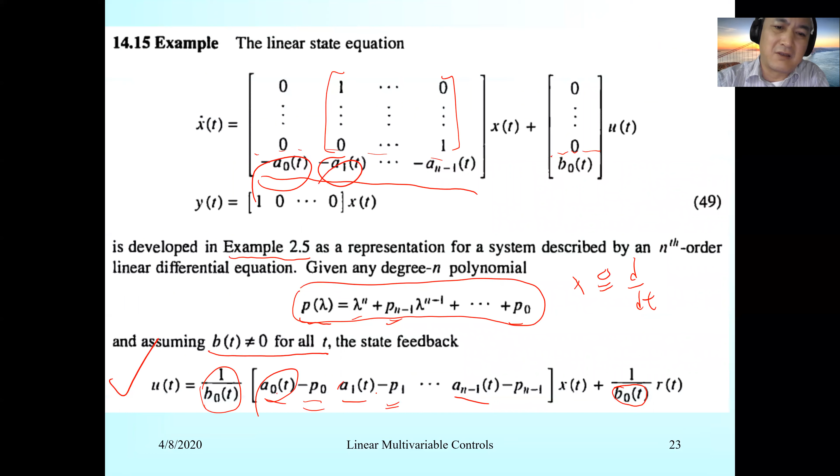This is a popular design method, okay? So the idea looks like, if we go back here, the idea of feedback linearization is, as you can see, to cancel out those bad guys. We can cancel out this one, it becomes 0, right?

So in other words, in the ME211 course, we are going to say that some of the nonlinearities might be good, could be good.

Okay, could be good. Say, for example, you have a system x-dot equals minus lambda x. So you'd say, oh, this is an exponentially stable system. Isn't this nice? Sure, it's nice. But if somehow I have the ability to change the system, say...

So I have a cube in here. Why should I cancel out the cube and replace it with this? You know, do you see my point? Okay.

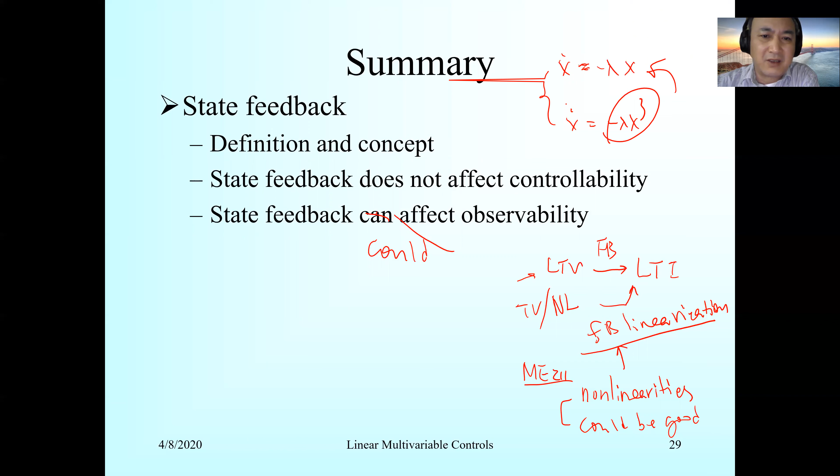So next time we're going to learn some deep formulas, deep formulas regarding pole placement algorithms. There are algorithms.

So in MATLAB, the corresponding traditional algorithm is called the Ackermann algorithm. But later people discovered Ackermann has some problems, some issues. I think now people aren't talking about this anymore, but when I was a student, it was a big deal. People always try to pick apart the Ackermann pole placement algorithm's hidden issues. But in MATLAB, I think the command is called place.

Okay, you can use place to check out what's in there. So as a linear multivariable control course member, this is called bread and butter. You should be able to explain what this is and perform this design. Of course, it's MIMO.

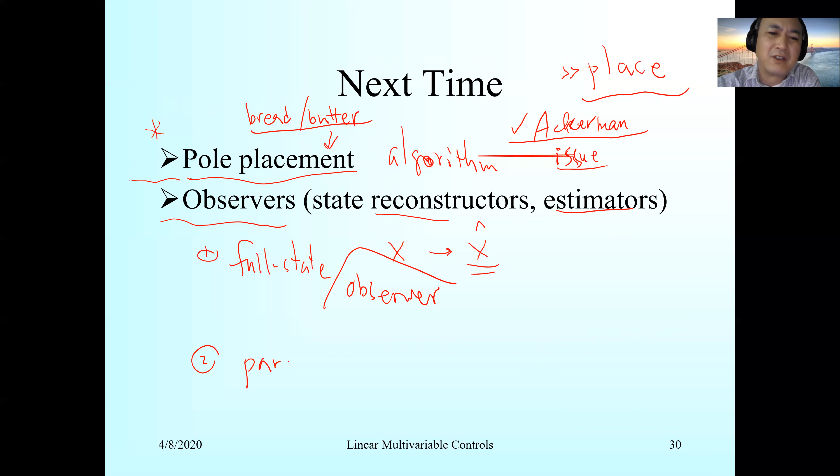But what if we have partial? You have some of them available, some are not. So it's called a partial state observer. But academically, they don't like the term partial, it's too oral. What do they say instead? Reduced order.

Reduced order state observer. This part is also important because you already can have some of the X observable or measurable, and only several remaining ones not observable. So why bother reconstructing all of them? That's not right, you should use whatever you already have, so you only reconstruct those partial unmeasurable states. So both scales are important for observer designs.

And this is just symbolic, the math is intense, but not hard. So don't miss the next lecture. It could be very important because these contents are considered key competency. In other words, if you never take this course and start reading this part, I don't think there's a way you can catch up. It's very hard to catch up.